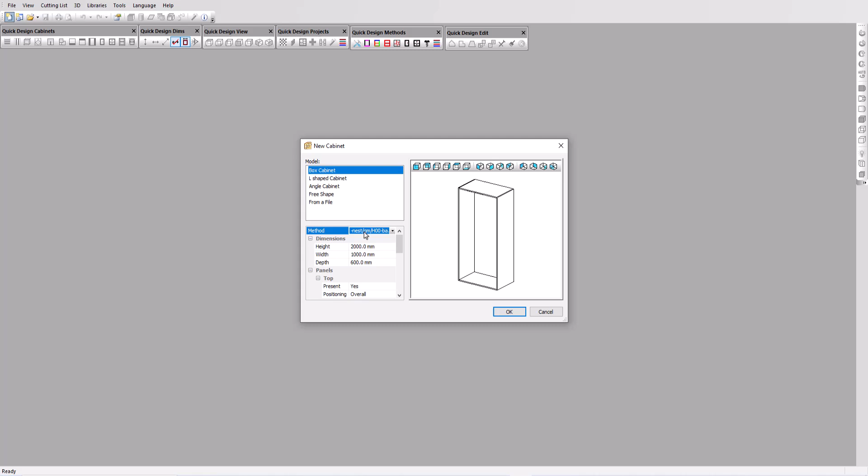This manufacturing method is a pre-configured collection of preferences we're going to apply to our project, including the material type, hardware, and the panel construction we want. Let's go with this method. It includes generic materials, Cabineo panel fittings and Blum Legrabox drawers. Click OK and we've got the start of our design.

Before we go any further, let's view in 3D and also show side by side the 3D and the edit window.

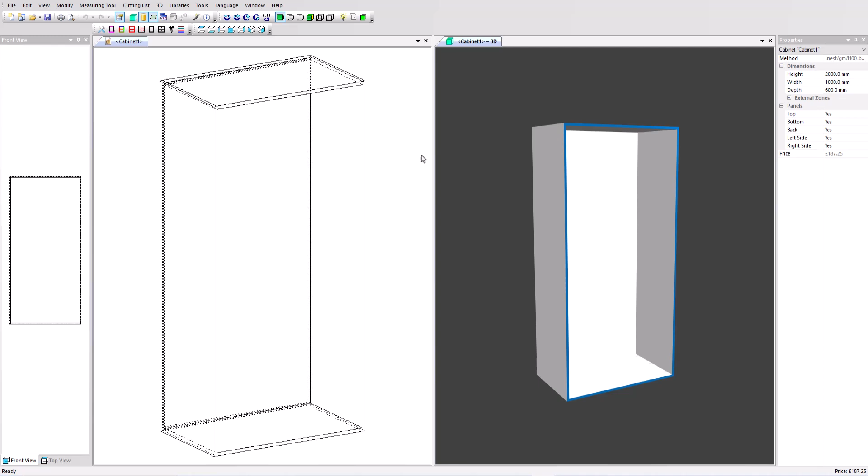First of all, I'm going to add a shelf. To do that, I click on the inner volume of the cabinet. I can now access in the toolbar a whole range of options, including now add shelves. I'm going to add a single fixed shelf, position it, distance from the bottom 700 millimeters. So the inner volume's now been split into two.

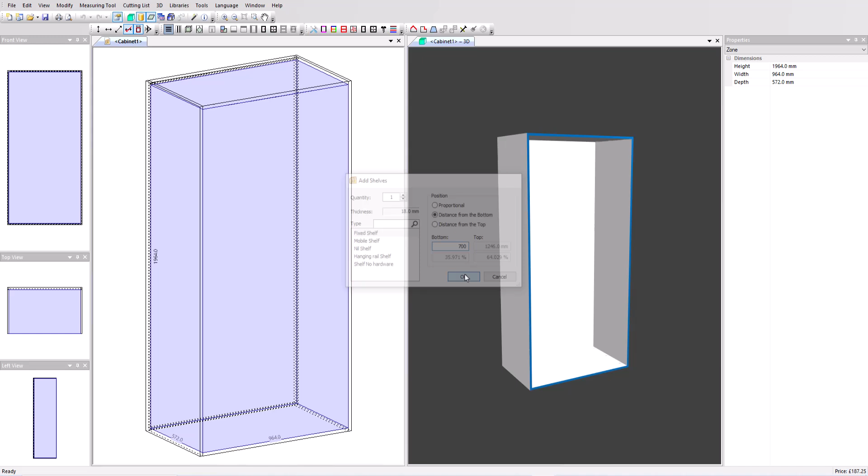I can click on the bottom volume and now add some drawers. I'm going to select these drawers which are 550 millimeters deep and add 3.

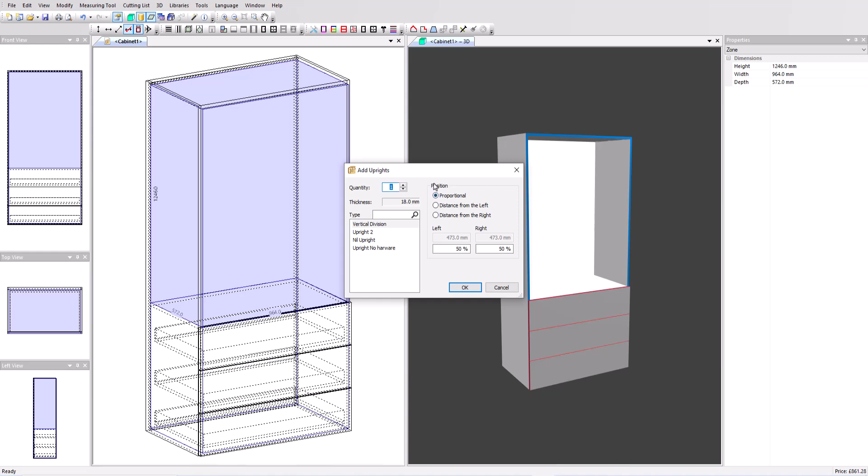And now in this upper volume, I could use the toolbars, but this time I'll show you a different option. I can right click and in the pop-up menu, access the uprights. I'm going to add 1. This time the position is going to be proportional. I want it in the middle, so it's 50% from the left and the right.

On the right-hand side, I'm going to add a single door, which is the initial option, and I'm going to have it opening from the right. And on the left-hand side, add some more shelves. Let's add 4 shelves here.

And finally, now I would like to add a plinth. I'm going to click outside the cabinet in editing mode, and then in the properties menu, I have these external zones to choose from. There's the plinth option. This will give me a space below the cabinet. I'm going to choose 78 millimeters, which is just right for some cabinet feet I'm going to add later.

So you can see this space has appeared. I can click on it, and now I've got the option to add a plinth. Let's put it just at the front and set it back 20 millimeters. So that's our initial design already finished.

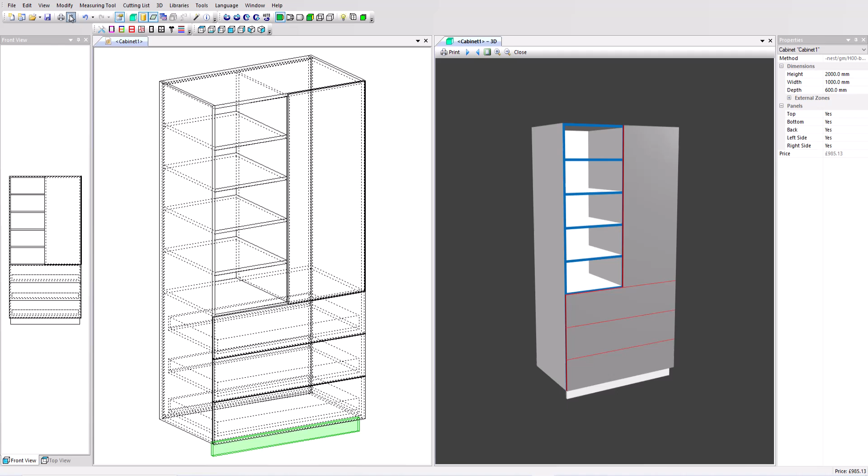Let's take a look at the manufacturing output now. I'm going to click on the 3D window, go into print preview, and we can send that image as a PDF to our customer. You can do screen grabs as well of any view you like.

And if I click now, let's close that and click on the edit window and do a print preview from here. This accesses the workshop document. Now that includes on the second page the cut list of all the parts.

We also have a costing report based on the material usage and the amount of hardware we've used. So this is a really quick way to get an accurate quote out to your customer.

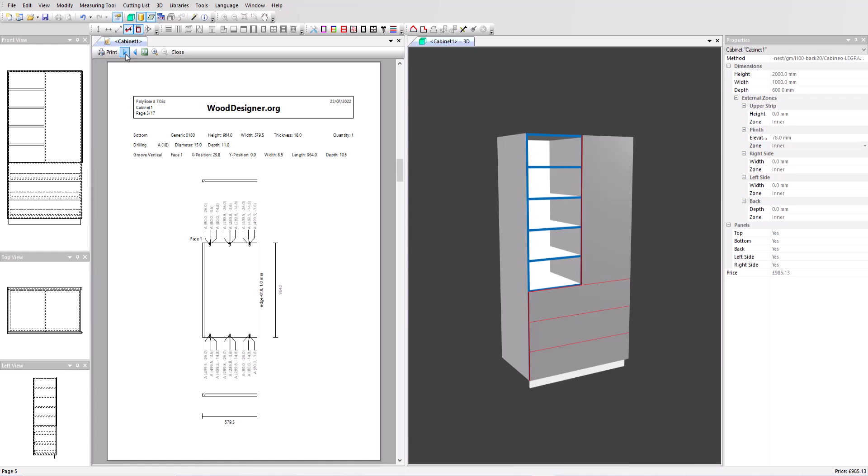And then after that we have a plan of every part in the project, including the position of all the hardware. Let's close that. Separately, in the File menu, we can go to Post-Processor Export and choose the correct post-processor to output part-by-part CNC files to run our machine.

So all this output is available in the fully activated version of the software, but we also have sample output available on the Polyboard download page.

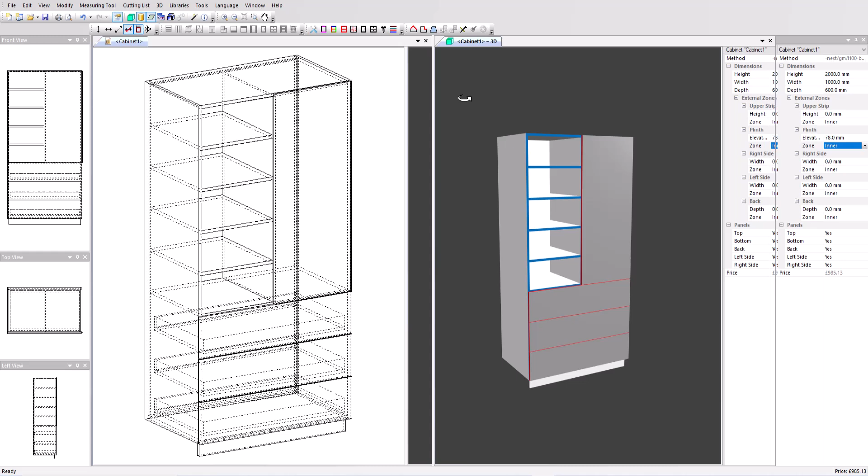So let's make some changes to our design now. Let's change some of the hardware we're using first. Before I do that, in the 3D, I'm going to view in wireframe and zoom in on just a section here of our unit. Here we can see the Cabineo applied.

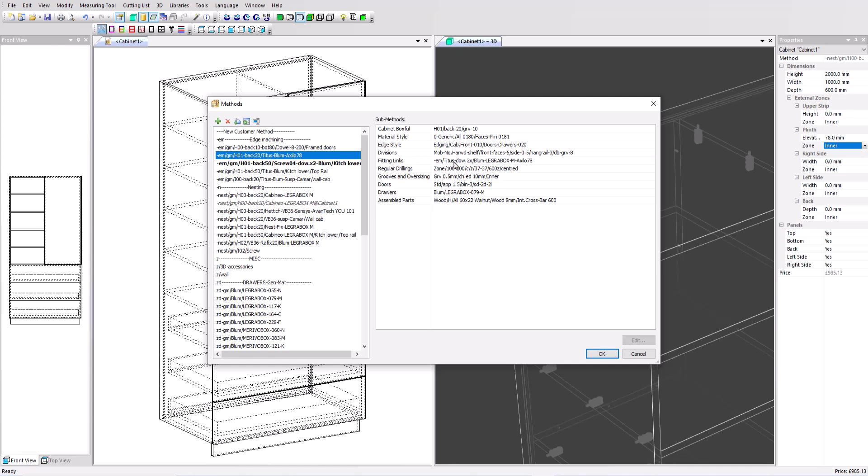So I'm going to choose a new manufacturing method now. Click on this icon and change it to this one. Now it's still got, if we look at the details of what's included in that method, all these sub-methods show that we still have, in fact, the Blum LEGRABOX drawer. We've also got these Axilo cabinet feet, and we've got these Camandowels to replace the Cabineos. I'm going to click OK to apply it.

And we can see those Camandowels have been added to our cabinet. Let's view back in 3D solid render, and we can see those cabinet feet at the bottom as well now.

Now we've got some edging applied. We've made that red and blue so it's visually very easy to spot and check our design. We could add a different texture to that if we wanted. In this case, I'm just going to remove the edging completely.

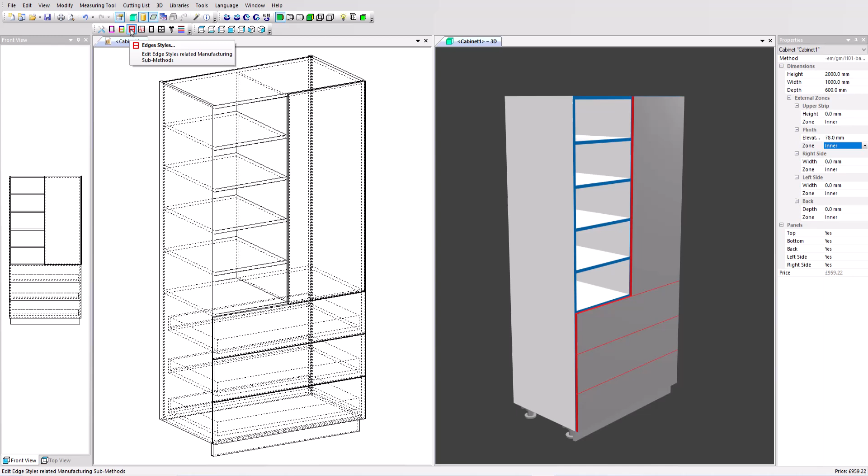Within the manufacturing method, we've got a sub-method for edging. If I click on that, I'm going to select this top one, which removes the edging completely. And let's also change the materials—we can do that with the materials sub-method. Instead, another option is the modify style wand.

I'm going to click on that, select the panels, and this material is our facades. You can see the colours currently grey. I'm going to right click and choose this Egger option instead.

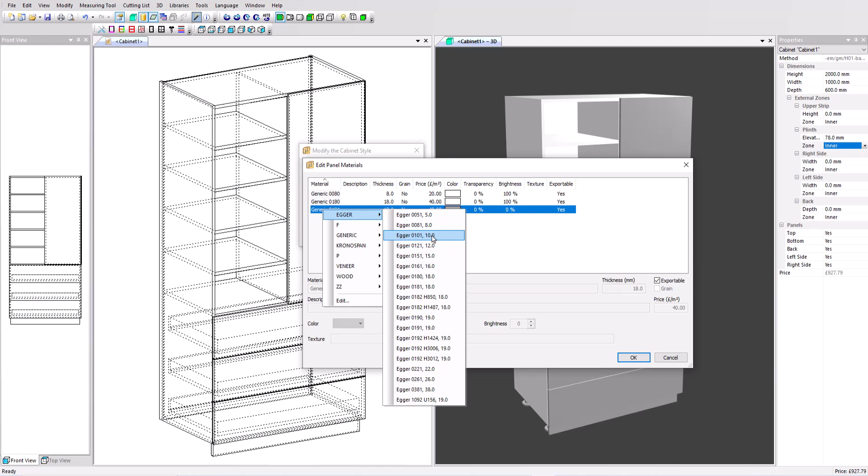To add a bit of contrast, let's also select the back material and change that to a generic Bianco material. So all the materials have been updated very quickly there. Click OK and we can see the results.

Polyboard's quick design libraries include a large range of configurations already set up, but everything can be customized as you want it. Over here in libraries and the sub-methods, we can see the full list of all the components of an overall manufacturing method. The fittings links covers the hardware.

We've got a materials sub-method as well, and the edging we've looked at. Divisions could be used to set back our mobile shelves, say 3 mm from the cabinet front, whilst keeping the fixed shelves flush. We've got some specialist methods here.

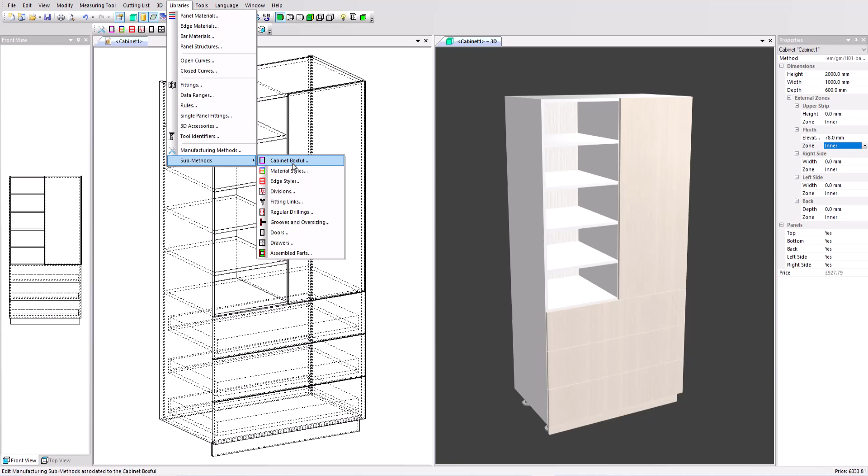We've got methods for doors and drawers to define how they're constructed, the slack and so on. And the assemble parts defines frame and panel assemblies. Let's just look at one now, which is a nice visual one, the cabinet Boxful, which defines how the carcass is set up.

So here, if I turn it round, you can see in this setup we've got the bottom recessed. We've got here some tenons. If I turn it round, you can see the back's recessed just ever so slightly, 10 mm. Here we have a setup with mitered panels as well.

So there's lots already in the libraries, but you can set it up exactly how you want it to.

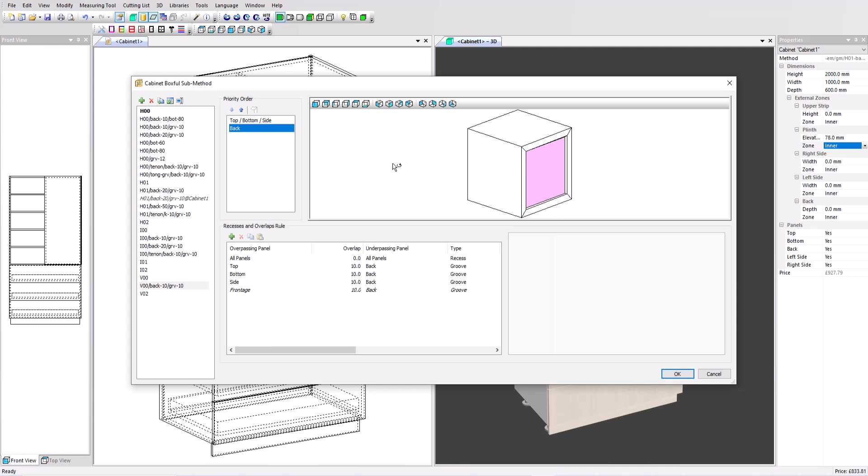Let's add a final set of design changes now. First, I'd like to add a sloping top. If I select the top panel, I've now got, again in the properties menu, a width slope option. I'm going to set that to -150 mm. That gives me a slope from the left to the right going upwards.

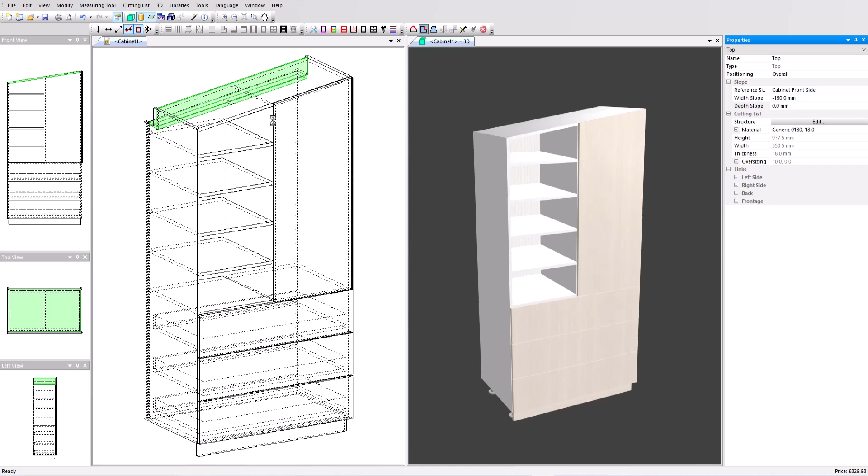And let's say we've got some pipe work we want to put in behind the cabinet, so we need a cutout. I'm going to click on the unboxing command and let's have the cutout between the top and the back, and keep the cutout 100 mm. Just click OK—you can see that applied here. And if I turn the 3D round, you can see that the cutout is immediately applied.

Now, perhaps your customer decides at the last minute they'd like a design change, some storage alcoves in these shelves. Let's add those now. I'm going to right click on this space and add 2 uprights, and do the same in this volume here.

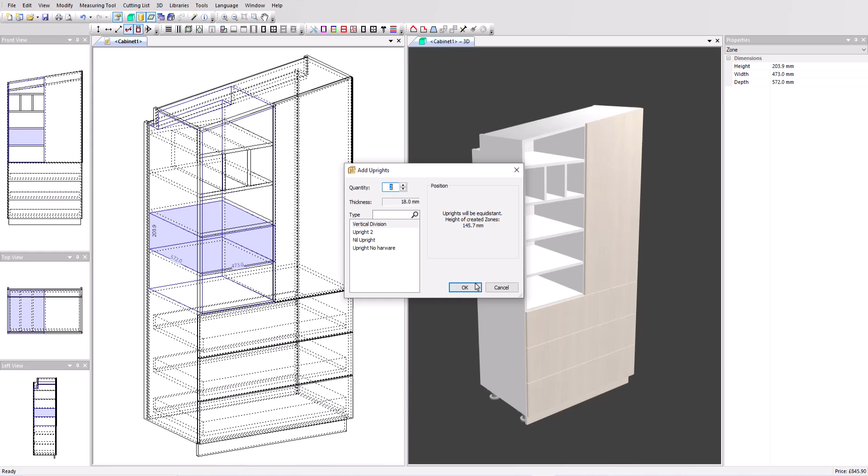We could just as easily delete this door and add some shelves, or take the drawers out and put double doors at the bottom. Okay, now lastly, let's say we've made just a slight error in the dimensions and we want to adjust the width of the unit.

I'm going to click outside the cabinet and in the properties menu, change the width so we can see it easily. Let's add 200 mm to the width. So now the carcass and all the parts within it automatically resize, and the position of the hardware adjusts as necessary too. All the manufacturing files have updated as well.

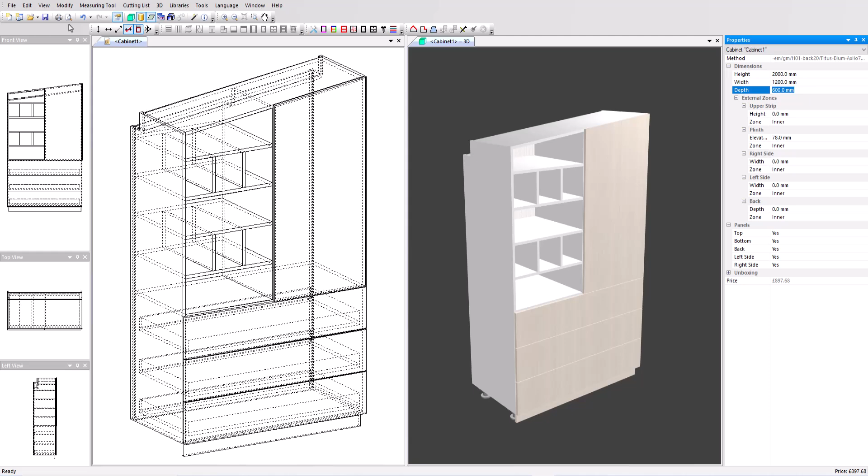Let's go and have a look at the cutting list. So here the left and the right side parts have different height—that reflects the slope we added. And the updated plans also include the exact angle cut to manage that slope too.

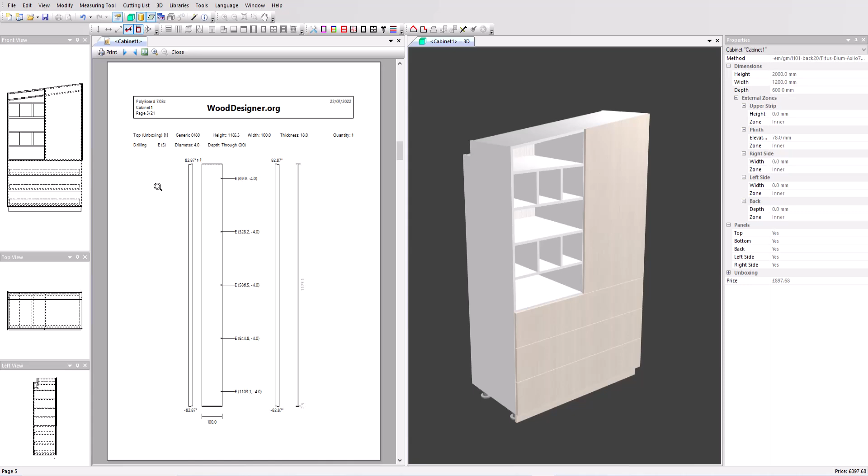This video was a quick look at just a few of the features available. There are a lot more possibilities which we cover in the resources on our website. But I hope it's shown you that design and editing is super fast. You can do it with your customer if you want as well. And the output is immediately available—it's dynamically updated as you change your design and 100% accurate every time. Thanks very much for watching.